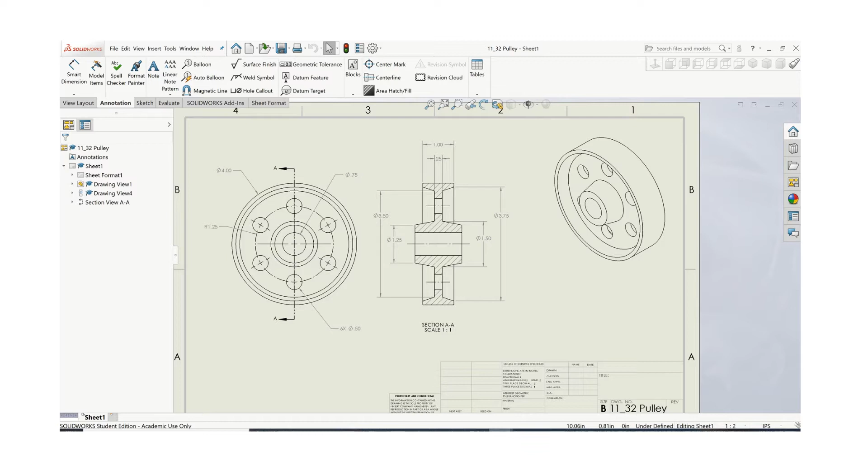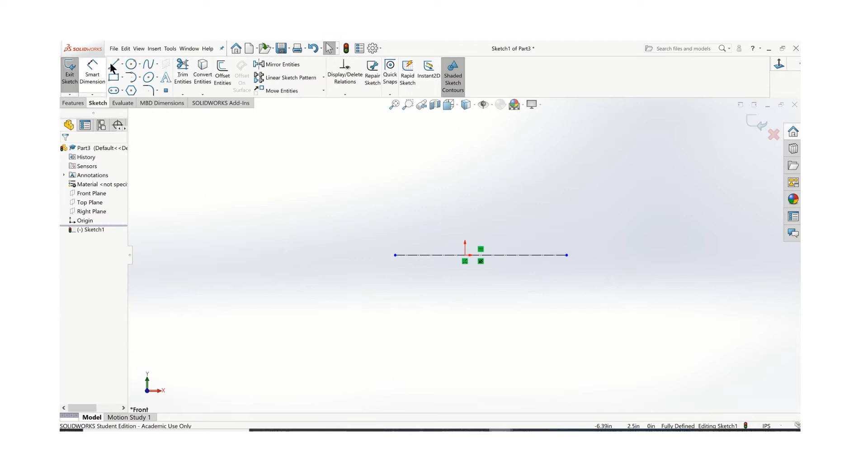Now, because of the nature of this, I'm going to use the revolve tool. So first thing I'll need is an axis on the horizontal. Doesn't matter how long it is. Right click, make it a construction line. Right click, make it fixed. Now the part has a hole in it, so you're going to leave a space between the axis and where you start your sketch.

And you can see these angled surfaces are kind of telling as to the technique that you're going to want to use. It'd be very difficult to construct this using extrude. Also, think about a couple things. One is I'm going to use all radial distances because I'm revolving it around this axis, so everything is going to double. So your drawing in your book shows everything in diameter. Here everything will be in radius, so cut those numbers in half.

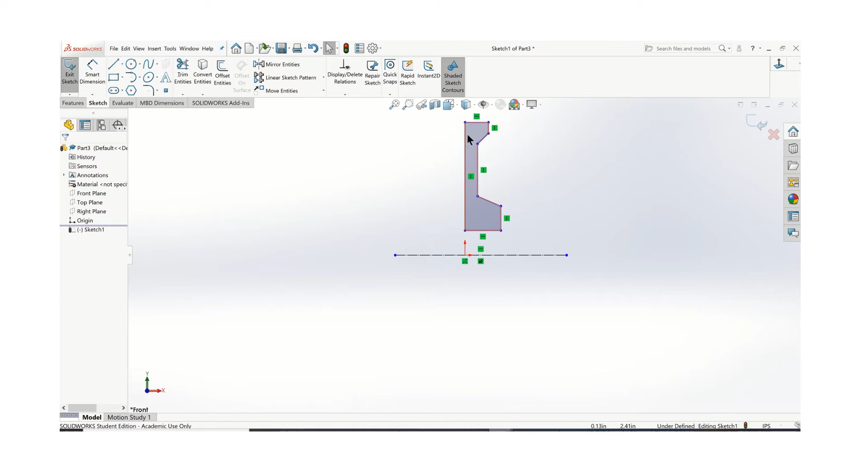The other thing I'm going to do is, because it's a little bit of a complicated sketch, not too horrible, I'm going to also mirror it. So I'm really just drawing like a quarter of this pulley right now. I'll revolve it and then I'll mirror it. So it's a good time to use that mirror tool as well, because this part has a 3/4 inch hole in it.

That means the space between the bottom of the sketch and the axis would be half of that, so it's going to be 0.375 and so forth. So for each of these dimensions, again, cut those in half. And when we revolve it, we'll have the correct values.

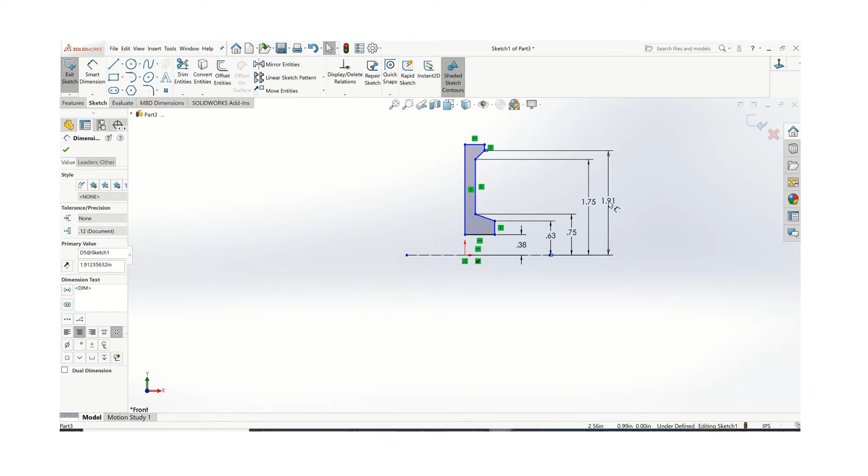That gets stuck in there somehow. Okay, that's 1.875. And then lastly, our overall, where this whole thing is a 4-inch diameter, so that's going to be a 2-inch radius. We'll also need the thicknesses here once again, because the technique I'm going to use is to create a mirror. I'm going to split everything in half.

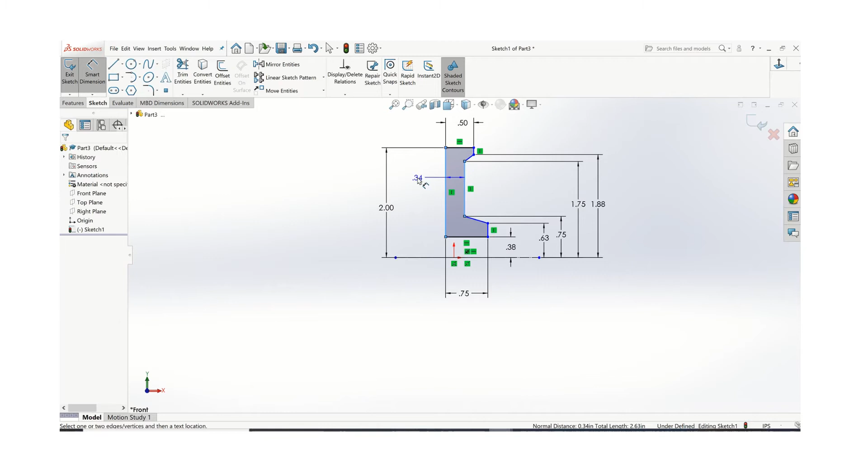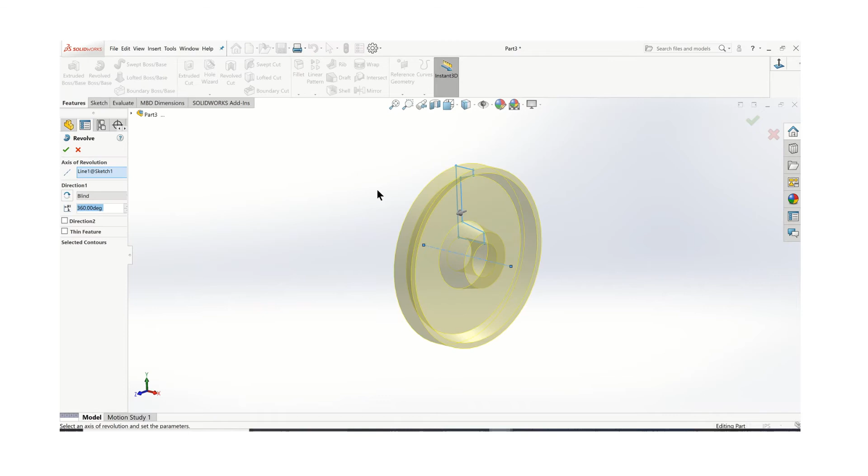Now it's blue still because it needs to know where I am in reference to that origin right there. So one thing you can do, you've seen me do this before, is just put a 0 dimension on that. That'll line it up. And I can finish my sketch. Revolve. And now I have half of my pulley.

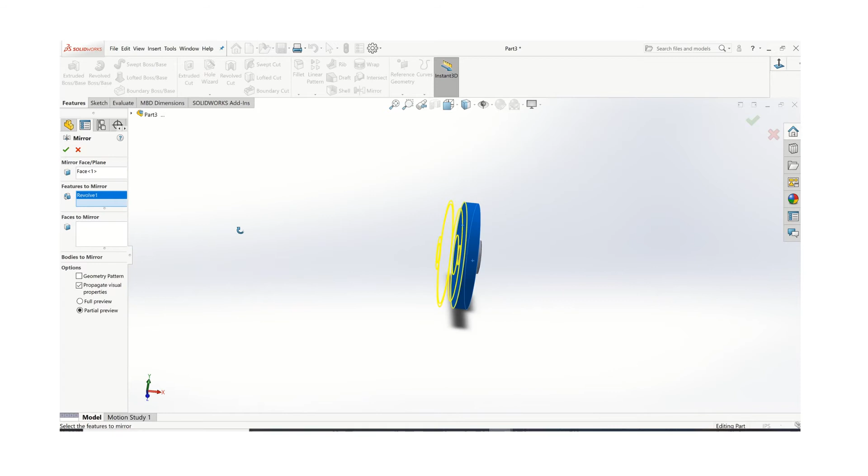Next I'll use the mirror tool. You're going to choose the mirror face plane. So basically it's either surface or plane that you want to mirror it about. That's going to be the back of the part. Then we'll come down here and choose the features to mirror, and that's basically the whole rest of the pulley. So there's the basics of the pulley.

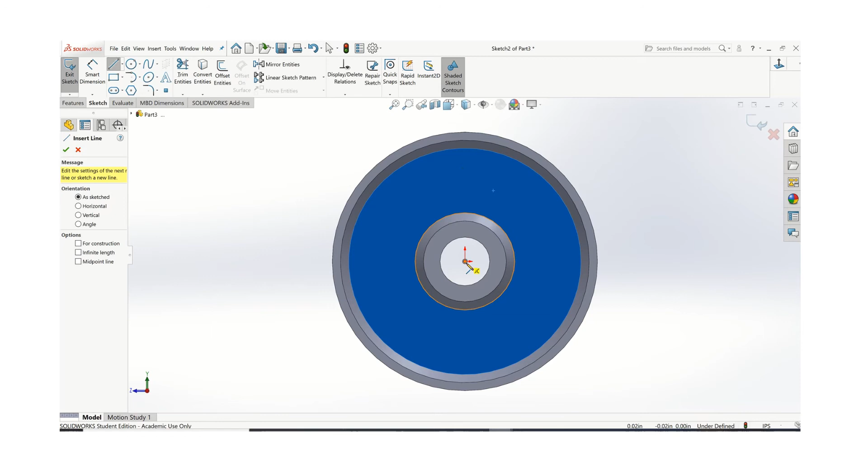Now we have that. We have 6 holes. There's a hole pattern that goes around there. We want to construct that. Next, we'll start with just one hole, and then we'll use the pattern tool. So we'll make a new sketch on that surface. I'm going to start with a horizontal construction line. Right click, make it a construction line, and right click to fix it, because I'm going to dimension my other features around there.

I'm going to need a construction circle, so just use your circle tool like you always do. And that circle is a 2.5 inch diameter circle.

And I'm going to need one more construction line to get my starting point for the holes. Don't fix this one because I'm going to set this angle now, and that'll give me my starting point for that whole pattern. Oops, I don't need a linear dimension, I need that angle. I'm not just going to randomly place these holes, I'm going to control exactly where they're located.

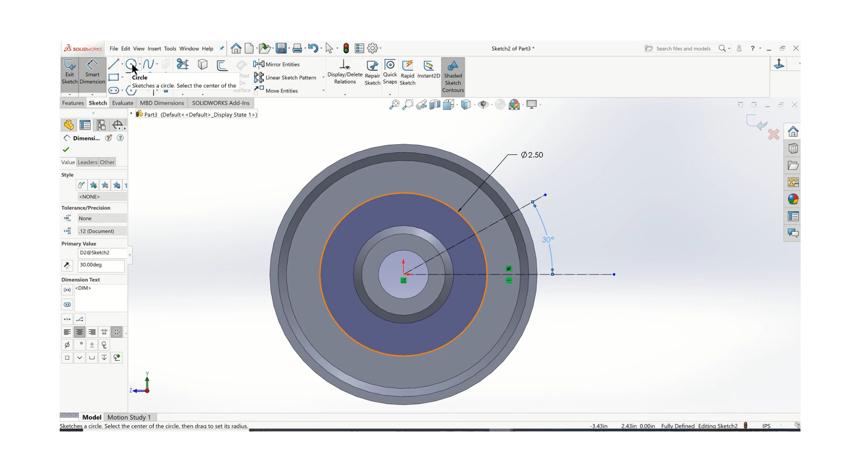Since there's 6 holes, there'd be 60 degrees between each pair of holes. I'm going to start with a 30-degree angle, and I'm going to put my first hole there, and then I'll create a pattern. And you'll see how, when we put this on the drawing sheet, how that all works out. So the next thing I want to do is sketch one of those holes, and that hole is 1/2 inch diameter.

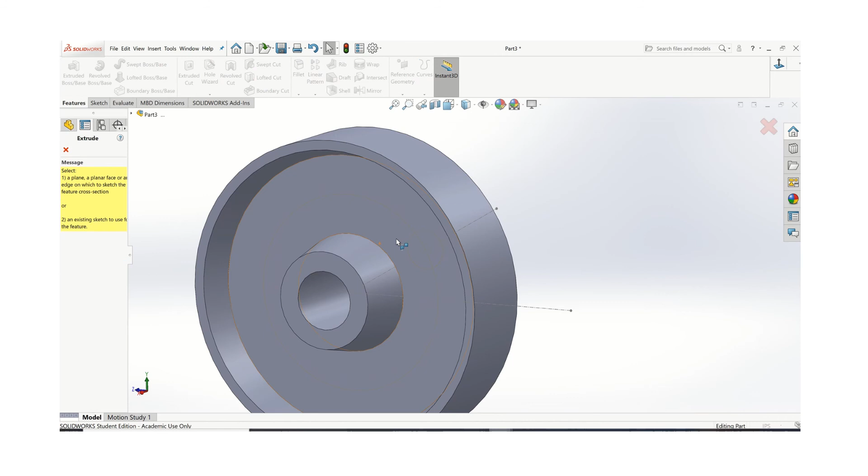So that's why we put those construction lines on there. Okay, it's a little bit hard to see, but it's on there. So let's go ahead and punch that hole out. And you'll see your construction lines go away.

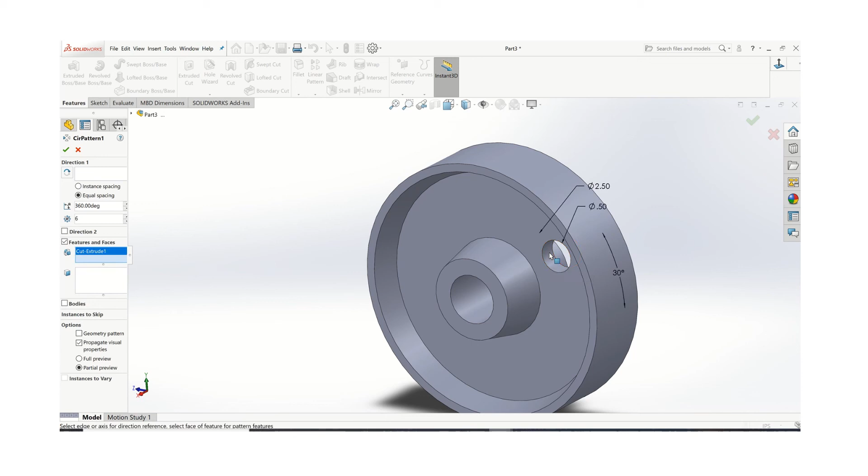So for my pattern, go up here where it says linear pattern, and we want to use a circular pattern. First thing you want to do is choose the feature that you want to make a pattern of. See how I've tilted it so I can see the depth of the hole. If you click on that, you'll save yourself from any problems there. And then come up here where it says direction.

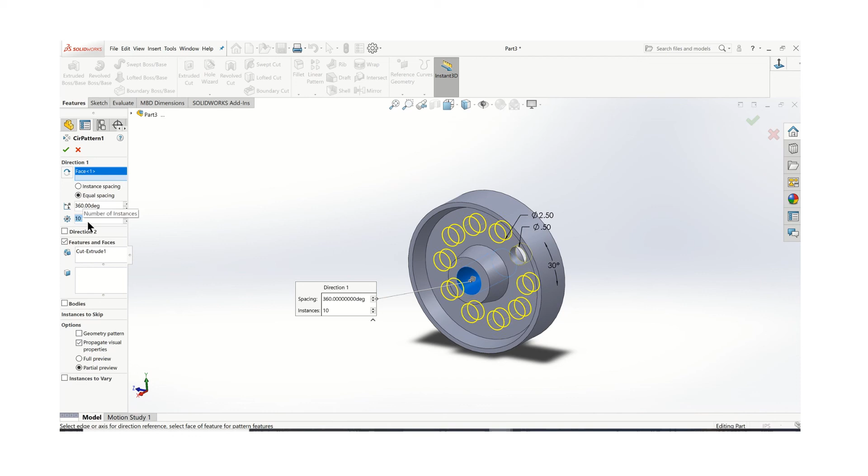Now if you hold your cursor, you'll see that's really the axis. So if you click in there, it's asking you where do you want to revolve it around. So if you click on this center hole, it'll find the axis. It'll rotate it around there. And this will be how many you want. So if I wanted 8 or 10 or 12 or whatever, in this case we just want 6. So there is our pulley.